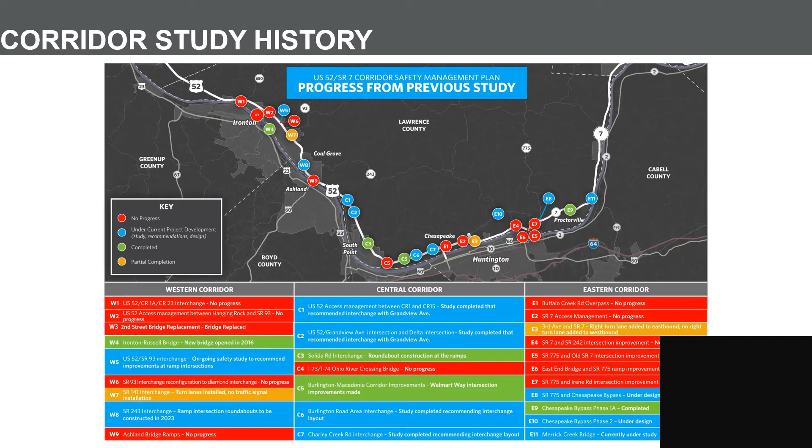The analysis of the corridor has documented the existing at-grade intersections and driveways as a way to identify locations that could potentially be improved to create a limited access freeway. There are currently 21 intersections from the Western County line to Chesapeake. There are 38 intersections and 215 private drives from Chesapeake to the Eastern County line.

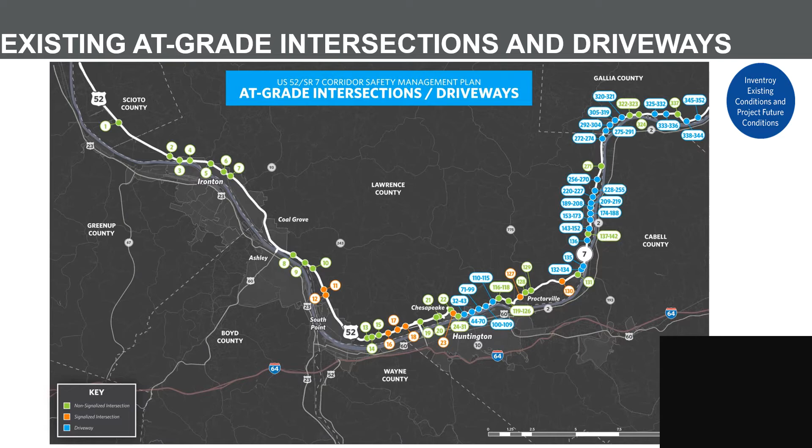An analysis of the origin and destination of vehicles from various points was conducted to determine where traffic is coming from and going to. This first map shows a point at the interchange of US 52 and State Route 823, the Portsmouth Bypass in Scioto County, just outside of Lawrence County. The opening of the bypass in 2018 has had an impact on the traffic in Lawrence County.

The map shows the destination of traffic that passes through this point. The lighter the color of the zone shown on the map, the more traffic is destined for those areas. This map shows that there's quite a bit of traffic in northern Lawrence County and northern Boyd County in Kentucky from using the bypass.

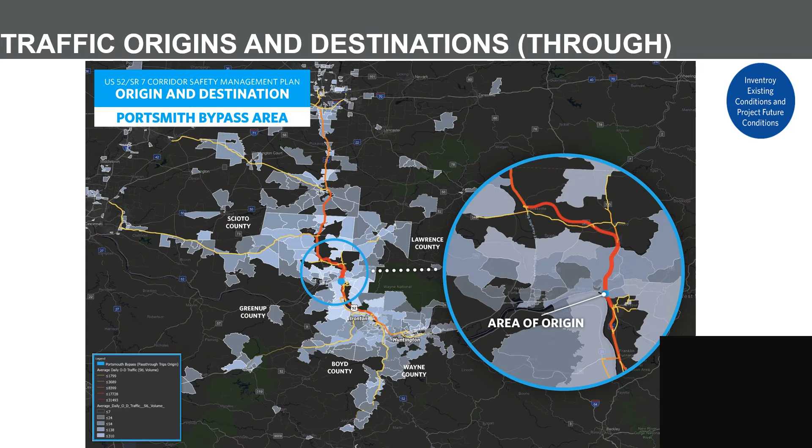Another analysis of the origin and destination of vehicles was conducted on the Ironton to Russell Bridge crossing. This analysis shows that many of the vehicles that are using the bridge are local traffic from around Ironton and Russell. The newer river crossing has not had that much impact on traffic using this route, and it's not necessarily diverting traffic from US 52.

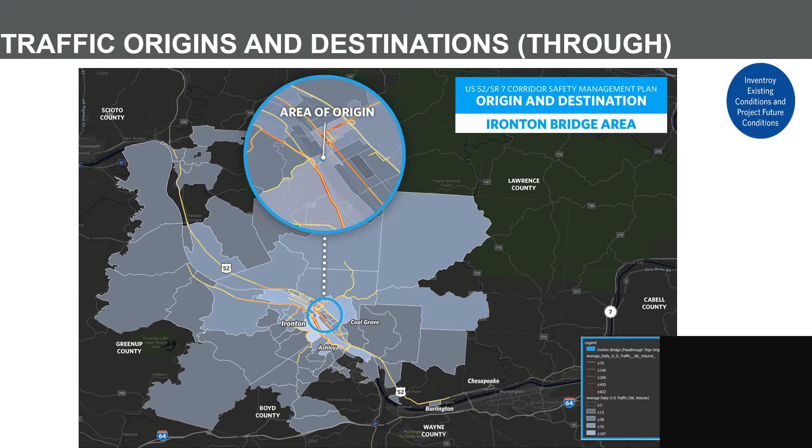Travel time reliability was calculated for the corridor using mobile data over a period of time to help determine the reliability of having the same travel time on any given day. A number closest to 1 means that one would have the same travel time for their trip along the corridor every day. The color yellow on the map is the closest to 1. A darker color has a less expected travel time.

Areas that have a less reliable travel time on the corridor are areas around the Ashland Bridge intersection, around Delta and Grandview Avenue, around Burlington, Macedonia and Charley Creek, as well as around the Proctorville area.

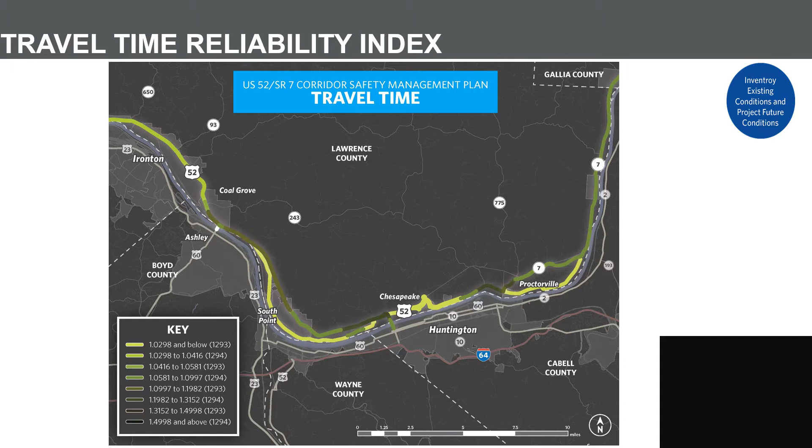Our traffic analysis includes evaluating existing traffic counts as well as the forecasted traffic volumes out to the year 2050 based on the KYOVA travel demand model. This map shows the traffic volumes and annual growth rates for some key locations on the corridor. The annual growth rate that's shown is the growth to the year 2050.

A range of the projected average daily traffic, which is ADTs shown on the map, are using the current projected growth rates as well as an expanded growth rate. The growth rate in ADT was expanded based on two scenarios. The first scenario was the inclusion of a new Ohio River crossing to the east of Huntington. The new Ohio River crossing is projected to slightly increase the annual growth rate on the western end of the county, but it will double the expected annual traffic for the eastern end of the county.

The second scenario includes tripling the rate of growth with the addition of the growth that's coming from the impact of the opening of the Portsmouth bypass in 2018. There was a traffic count on US 52 just to the west of Lawrence County that's shown that there has been a larger percentage of traffic growth in 2019 since the bypass had opened. The upper end of the ADT range will be used to develop improvements.

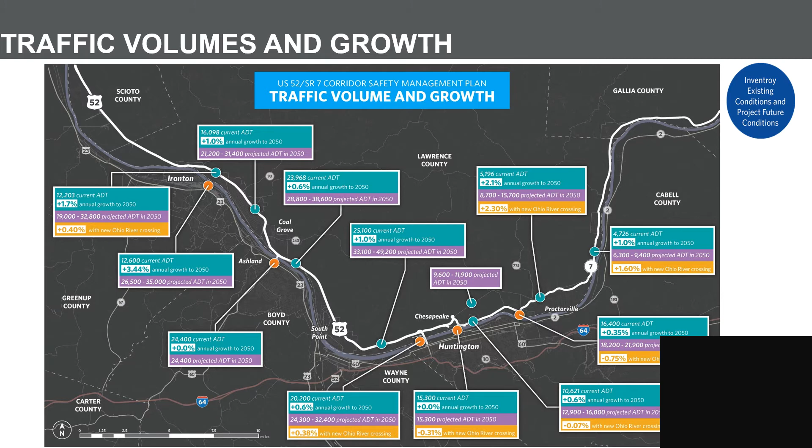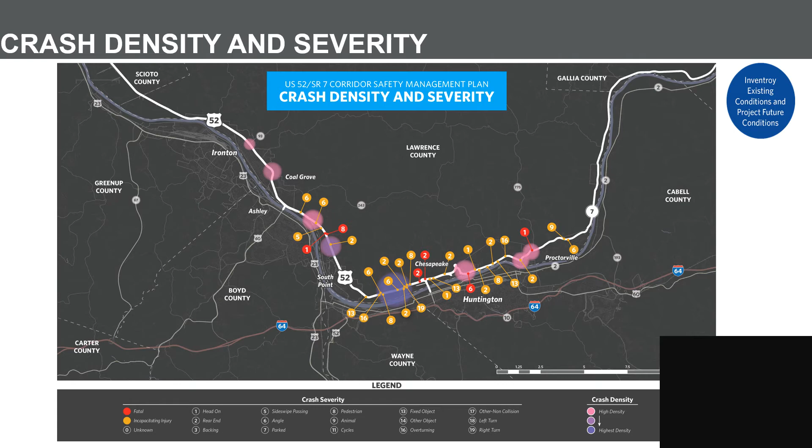Crash analysis conducted to date identifies areas where the most crashes have occurred and those locations where the crashes have been severe. Many of the areas shown on the map are areas that are well known as safety problems and are currently being addressed with some sort of project development, such as projects in the Burlington Macedonia Road area, Charley Creek, and the Chesapeake area. The rest of the areas will direct our study team to develop solutions to address any of the problems.

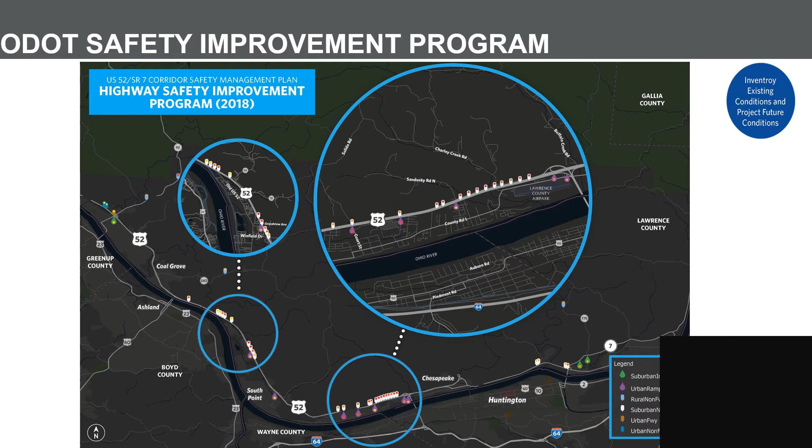Further analysis has identified locations along 52 where the interchange entrance and exit ramps do not meet the state standards. The locations are under further study to determine if these current designs are a cause for any crashes, and if so, how can they be improved.

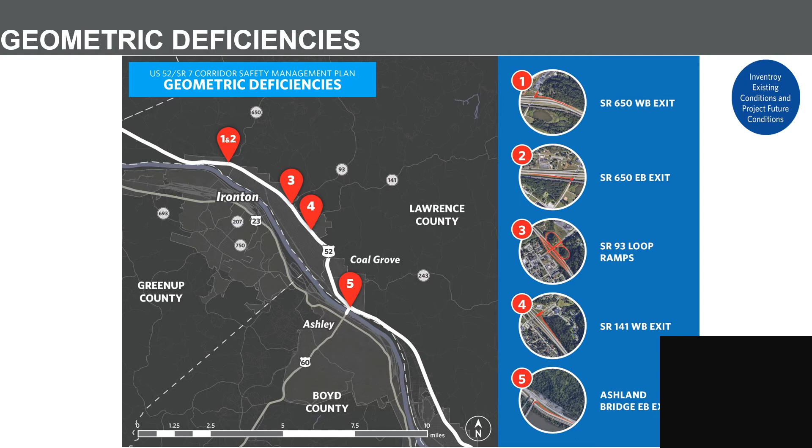ODOT uses a traffic operations assessment systems tool called TOAST that scores and ranks areas throughout the state based on the travel time performance, safety performance, traffic volumes, and incident clearance. This map highlights areas within the county where the rates are between fair and poor for those performance measures. As shown on the map, the locations that are rated poor and show up as red indicate locations that should be addressed with future improvements.

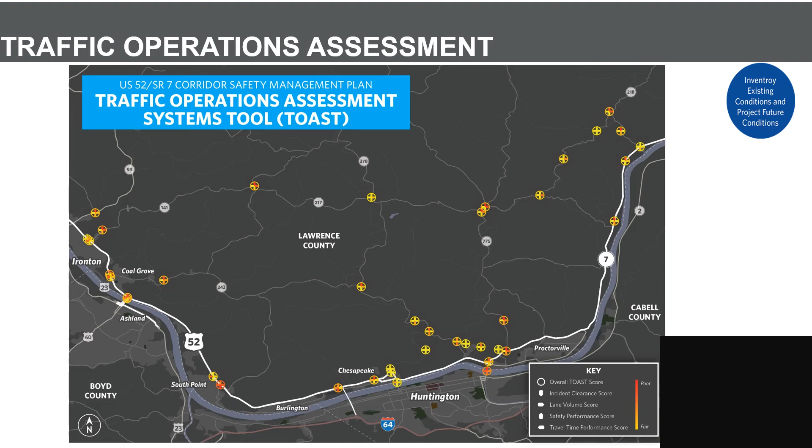The roadways within the study area are forecasted to become much more congested as a result of traffic projections from the growth and potential development. Traffic levels are measured by level of service A through F, A being the best and F is the worst. Level of service A is no waiting. Level of service D, you start to see delays in waiting. At level of service E, you'll be waiting much longer, and at level of service F, you'll basically be standing still.

The level of service grades are generally based on the delays at the intersections. ODOT strives for a level of service C, but in many cases level of service D is also acceptable. This map shows the no-build level of service for the interchange ramps and intersections along the corridor. Some of these areas with the level of service E or worse will be addressed with future projects.

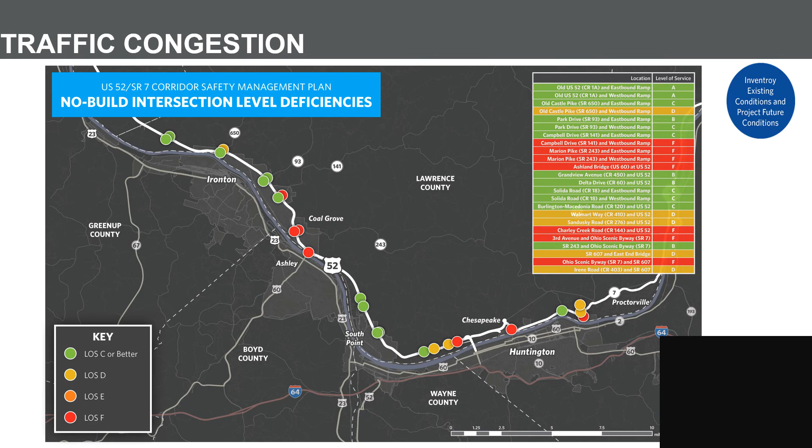So what does all this data tell us? Well, there are a few takeaways from this information. Following analysis of the data, a matrix was developed for locations along the corridor to bring together all of the data to show where there's some issues and opportunities. The low travel time reliability, at-grade intersections and driveways, development opportunities, congestion issues, high crash issues, geometric deficiencies were all documented. Also marked were locations where there's current projects or studies underway.

The areas that were shown to have a high crash density and included in at least two of the other categories were highlighted. The darker orangish color shows the areas that have more issues and opportunities for improvement. This helps the study team to direct resources to determine additional improvements, as well as providing guidance on developing prioritization for funding in the future.

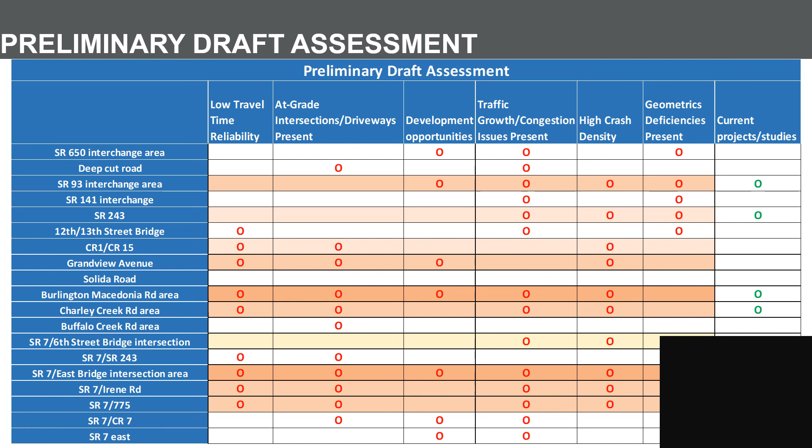So following this presentation, the study team would like to get your feedback on all the information shown to date. So please let us know if there's any additional information or any revisions that you have.